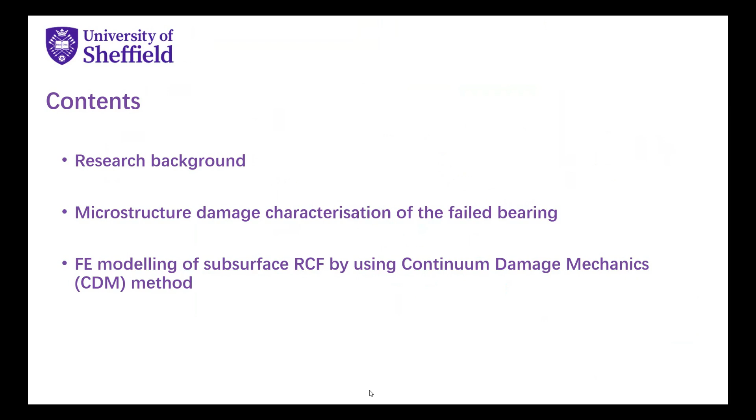So my name is Rui, and I'm going to talk to you about my research on the damage characterization and FE modeling of the subsurface rolling contact fatigue in wind turbine gearbox bearings. At the beginning of my presentation today, I'm going to talk about my research background. Then I got some real pictures from the real failed bearing, and I'm going to show you these pictures about the subsurface rolling contact fatigue. And in the end, I'm going to introduce my FE modeling of the subsurface rolling contact fatigue. I use continuum damage mechanics, which is called the CDM method, in my FE modeling.

Okay, here's the research background. If we look at the picture in the top right, it is the structure of the wind turbine drivetrain. Of all the drivetrain failures, gearbox failures take about 10% of overall drivetrain failures. But in these gearbox failures, bearing problems are a big issue, taking about 76% of overall gearbox failures. And that is the reason why my research is on the gearbox bearings.

There are 2 bearings I investigated in my project. The first one is the upwind planetary bearing, which has been marked by these black circles here. And the second one is the downwind planetary bearing. They all come from the V80 2 megawatt wind turbine gearbox, and the manufacturer wanted us to find out the reason for the premature failure of these bearings. Based on our investigations, we found that the subsurface rolling contact fatigue, the subsurface RCF, is very important to this premature failure of the bearing.

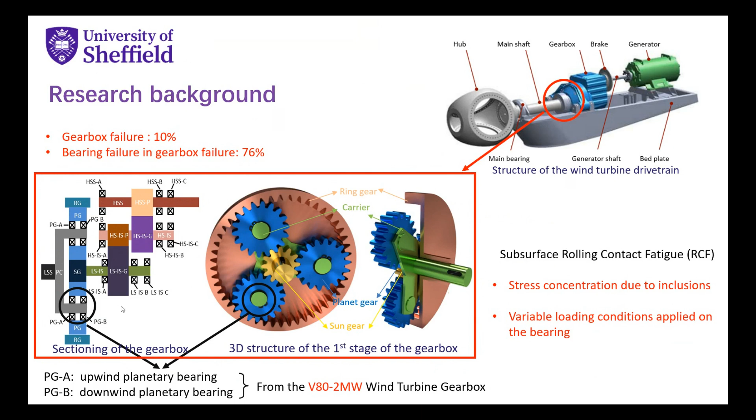And we also found that there are 2 reasons for the rolling contact fatigue here. The first one is the stress concentration caused by subsurface inclusions. And the second one is related to the loading applied on the bearing. So sometimes overloading cases may accelerate the subsurface rolling contact fatigue and cause the premature failure of the bearing.

Okay, let's look at the microstructure damage characterization first. On the left-hand side, the inner raceway of the bearing is fixed with the planetary carrier. So when you put a torque on the bearing raceway, the loading zone is fixed, as shown by picture B here. So in the real bearing, you can see a certain area on the surface is damaged, but not everywhere is damaged. It's just fixed on a certain area.

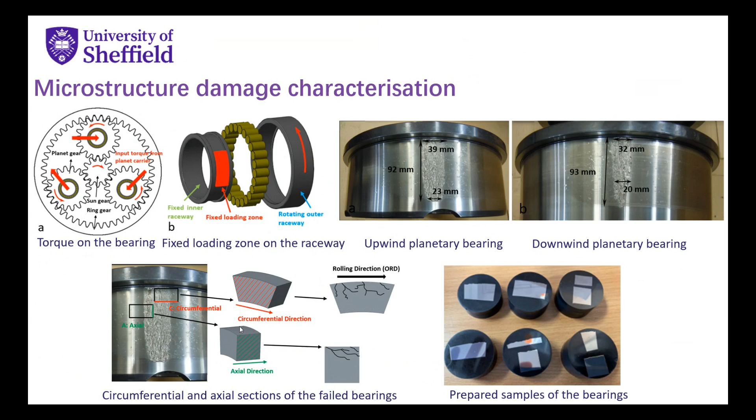And I'm going to look at the subsurface damage in the circumferential direction and axial direction to see the difference between these two sections. Before we use the optical microscope and SEM to do the observation, these samples should be polished and etched, as shown by the picture here.

Okay, here are the pictures of some rolling contact fatigue damage. I think the first damage stage is the damage caused by the subsurface inclusions. In most subsurface areas of the bearing, most inclusions are undamaged, as shown by figure A and figure B here. They are undamaged inclusions.

But because we have the heat treatment and loading on the bearing, sometimes we get some boundary separation between the steel matrix and the inclusion, and sometimes the inclusion itself may have some internal cracks, as shown by picture E and picture F here. They are internally cracked inclusions. So the stress concentration level of these inclusions will be higher because they are already damaged by this boundary separation or internal cracking.

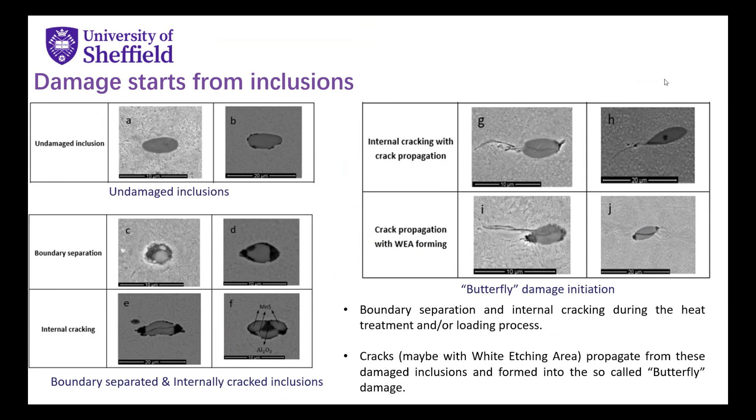Then we got some subsurface rolling contact fatigue cracks that propagate from the tips of the inclusions. These are so-called butterfly damage. And sometimes we can also observe some white etching areas around these butterfly cracks. These white etching areas are a change of the steel structure from martensite to ferrite, and it makes the material become hardened and much more brittle, and it reduces the toughness of the structure and accelerates the crack propagation here.

And the second stage of the rolling contact fatigue is related to the crack propagation. So when we have the fatigue cracks propagate from these small inclusions, they may connect with each other and form very long subsurface crack networks, as shown by picture A and picture B here. They are all subsurface cracks. And if these subsurface cracks propagate to the surface, it will cause spalling on the surface, and it accelerates the failure of the bearing, as shown by figures C and D over there.

And when the surface is already damaged, it will cause very high stress concentration on the surface, and sometimes, because the surface is damaged, we may have some impact loading from the rollers. So these kinds of loadings may cause secondary cracks, as shown by the pictures on the right-hand side. These secondary cracks are typically very long because the loading is very high, and it accelerates the failure of the bearings and accelerates the spalling on the surface.

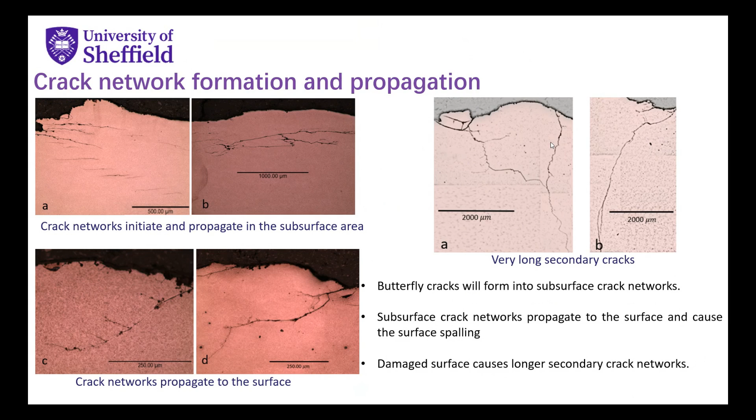And also, we can observe some white etching areas of these cracks. As you can see on the left-hand side is a very long white etching crack, WEC, observed in the subsurface area. And you can see many WEAs can be observed near the cracks. And at the moment, we still don't know which one forms first, the WEA or the cracks. But in this case, I think the crack may initiate first,

because if we look at this picture in detail, we can see the white etching area in a very deep area, about 4 millimeters below the surface. And I think without the influence of cracks, the white etching area will not be produced in such a deep area, because the effect of loading on the surface may only affect the region about 1 millimeter below the surface, but this one is about 4 millimeters, so it must be the effect of cracks.

So in this case, I believe the cracks initiate first, and because of the formation of cracks, there may be some very complicated reactions between the crack surfaces, maybe squeezing and friction and heating between these crack surfaces. And then we have the dissolution of cementite and the redistribution of carbon and chromium elements. Then we have the white etching area along these cracks, and that is the so-called WEC in this specific bearing.

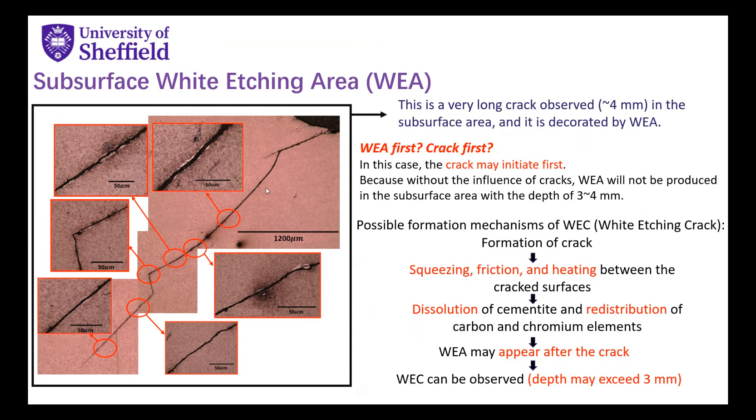So here's the quick conclusion. In stage 1, we have butterflies, and the cracks may propagate and connect with each other. So that is the subsurface crack network. Then we may have some WEA and WEC, which accelerate the crack propagation. And the final stage is the surface spalling, or the premature failure of the bearing.

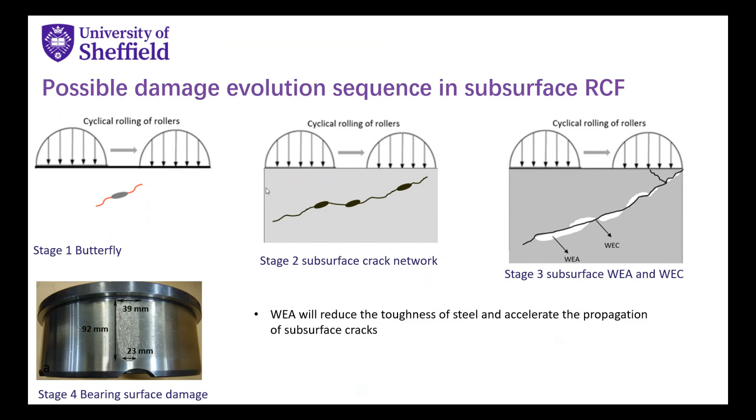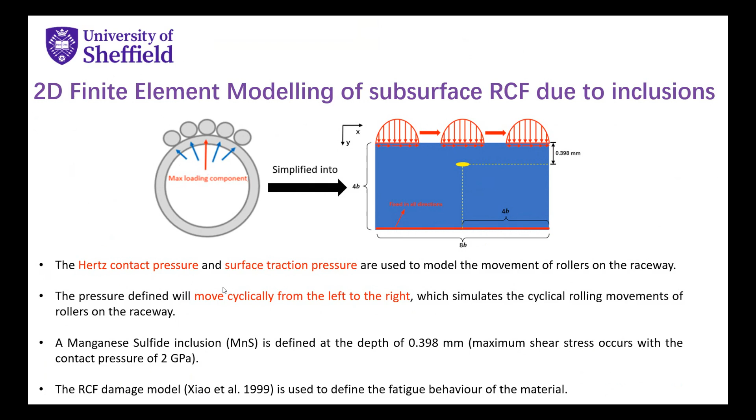Okay, let's look at the flowchart of the FE modeling with the CDM method. At first, I defined the plastic deformation in my modeling because we have the stress concentration due to inclusions, so there may be some plastic deformation in the subsurface area around these inclusions. And when yielding happens, I also consider the Bauschinger effect of the material. Then I calculate the back stress, and I update my stress based on the kinematic hardening model here.

And as you can see in the red circle here, this is the equation I used to update the damage parameter D in the CDM damage model. In this fatigue model, this D value is related to the amplitude and mean value of the alternating orthogonal shear stress. The reason why I use the amplitude and the mean value of the stress is based on the Goodman fatigue theory, because it holds that the fatigue behavior of a material is related to the stress level and the mean stress of the overall loading.

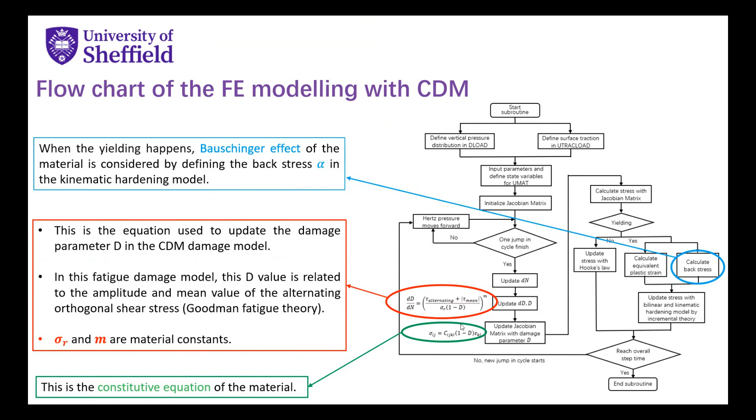So that is why I use these two stresses here to calculate the damage value. Sigma r and m here are material constants which can be determined from the S-N curve of the material. In the green circle here, this is the constitutive equation of the material. When the damage happens, the stiffness of the material is reduced. Then I update all the stress based on the constitutive equation here.

Okay, let's look at the results of my FE modeling. At first, I'm going to figure out the effect of the inclusions with different damage types based on the optical microscope observation. We have found that some inclusions are undamaged, some have boundary separation and some have internal cracks. So I compared the effect of these three kinds of inclusion damage.

In these three FE models, the maximum Hertz contact pressure is fixed, the contact cycles simulated are 20 million, which is also fixed, and the traction coefficient applied is 0.1. The traction pressure is caused by the friction between the roller and the raceway, so this value is linked with the lubricating condition. When the lubrication is good, the coefficient is small. In all three models, the value is fixed as 0.1 here.

If we look at the results, we can find there isn't any damage at the tips of the inclusion in the undamaged inclusion model, but when there is boundary separation between the inclusion and the steel matrix, there is a fatigue crack here. And there is also a fatigue crack here when the inclusion is internally cracked.

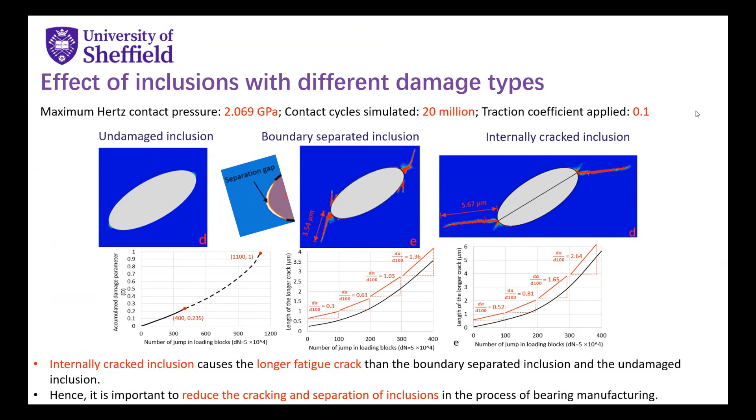Then I'm going to investigate the effect of surface traction pressure. I change the surface traction coefficient from 0.01 to 0.1 to see the difference in surface traction pressure, and all other values are fixed, such as the maximum contact pressure and the contact cycles simulated.

Based on the modeling results here, the fatigue crack length increases with the surface traction pressure, especially when the traction coefficient exceeds 0.05. That means when the lubricating conditions become worse, it will accelerate the fatigue and the damage of the bearing. So a bearing with better lubricating conditions will have a longer fatigue life.

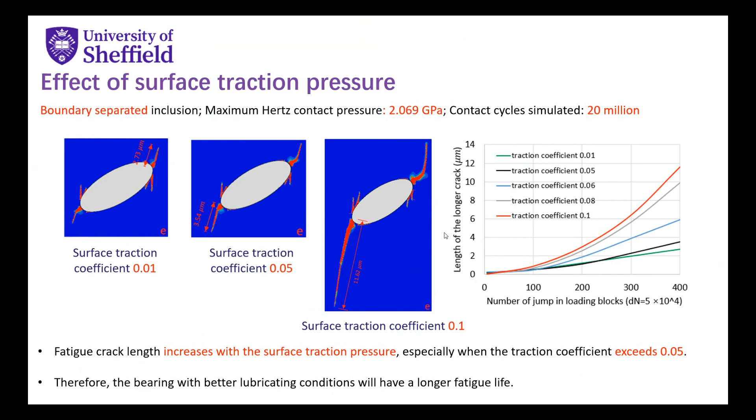In the end, I'm going to study the effect of the loading variation on rolling contact fatigue. In this case, the loading is not a fixed value, but changes from 0.92 to 2.84 gigapascals. All these values come from the calculations of the wind turbine design standard. If you look at this picture here, in this case the loading only changed once from 0.92 to 2.84.

But in this case here, I call it two loading groups because it changed twice, from a smaller value to a big value, then from a smaller value to a big value again. And we can see the difference. The fatigue crack becomes longer than when it changed once.

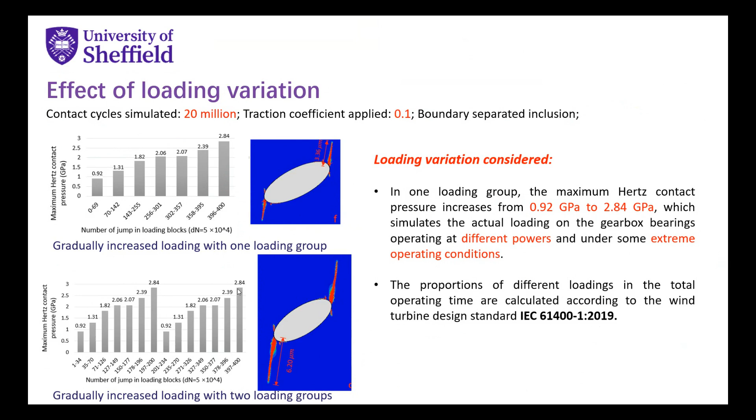Then if we change it 4 times, I call it 4 loading groups. It changes 4 times from the smaller value to a big value, and when we compare these results together, we find that with 4 loading groups, the crack length is longer than with 2 loading groups and 1 loading group. So the loading sequence of the different loading amplitudes does affect the initiation and the propagation of fatigue cracks. And the more frequently the high stress magnitude occurs, the longer the fatigue crack will be.

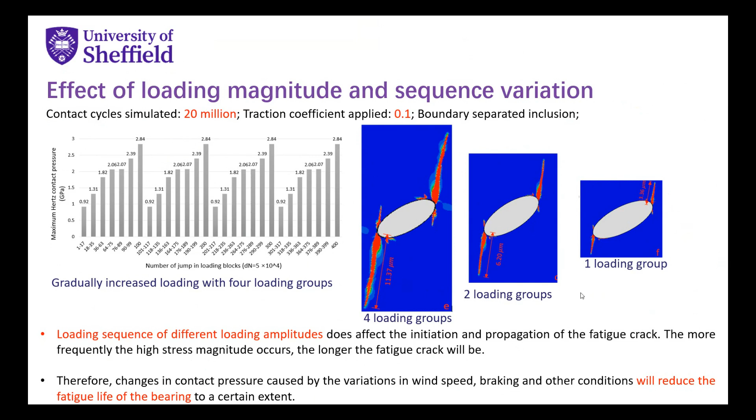As I said, this change of loading may come from the change of wind speed or other conditions such as braking or grid loss, which may all cause a change of the loading on the bearing.

To validate the effectiveness of the FE modeling, I compared the modeling results with twin disc test results from a published paper of the University of Southampton. It can be found that my modeling results are very similar to the real butterfly damage in the twin disc test.

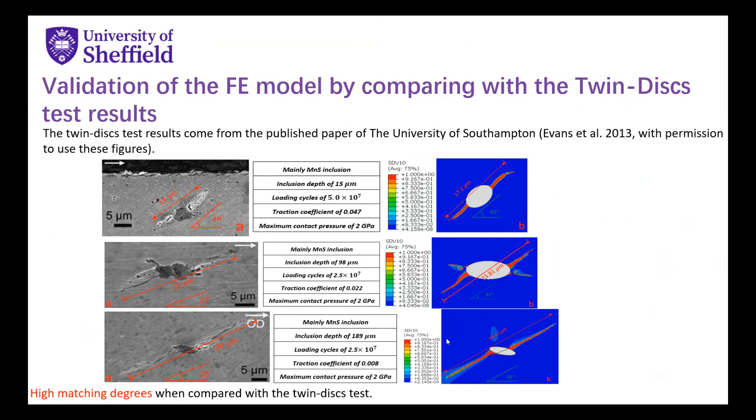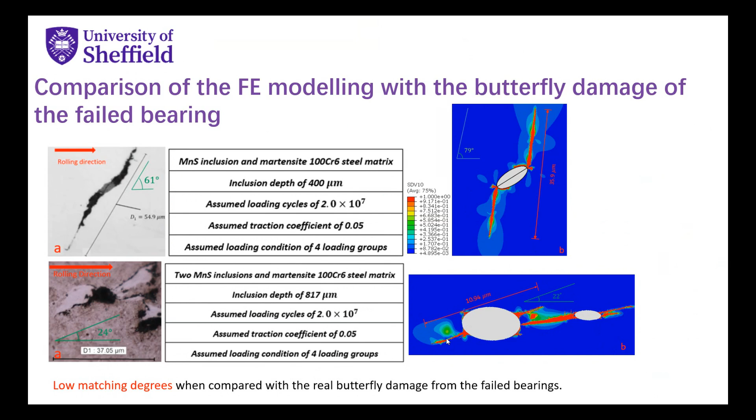I have 3 comparisons here, and all the results I think are very good. But when I use this FE modeling to simulate the real butterfly from the real failed bearing, I think the result is not satisfactory, because when I compare the propagation direction and the length of the butterflies here, they have a very large difference from the real butterflies in the failed bearing. So I think there may be some problems here.

First, the effect of the difference between the assumed and the actual loading conditions on the raceway, because we can't simulate the real loading conditions on the bearing, so that may cause the difference. That's the first reason. The second reason is the geometry of the inclusions in the modeling. It's just a 2-dimensional model, but in the real case the inclusion is 3-dimensional, and it may have irregular boundaries, which is not considered in the modeling.

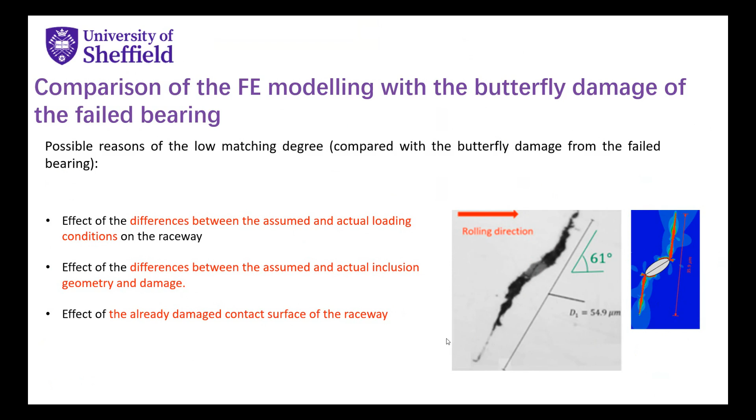And the last one is the already damaged contact surface of the raceway. Because the raceway surface is already damaged, it may cause some stress concentration or change of pressure on the surface. So that may also cause the difference between the modeling and the real butterfly damage from the bearing.

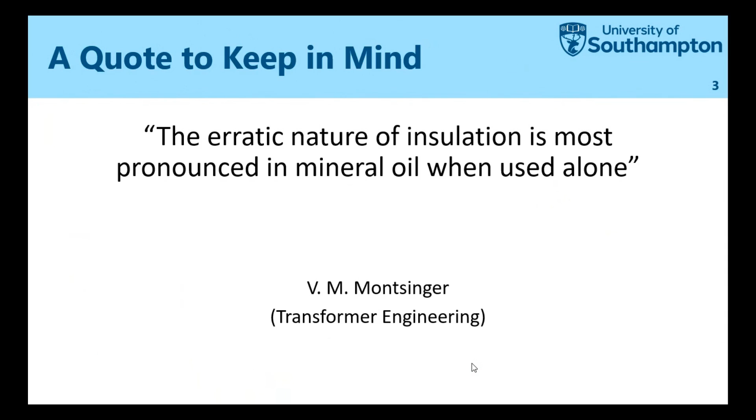A little bit of background to where this study comes from. Similar to Rui's wind turbines, electric motors have stray currents that are induced in their housing, and then they pass through the bearings, and those stray currents can cause the bearings to fail faster than ones that are uncharged, as in a regular wheel axle.

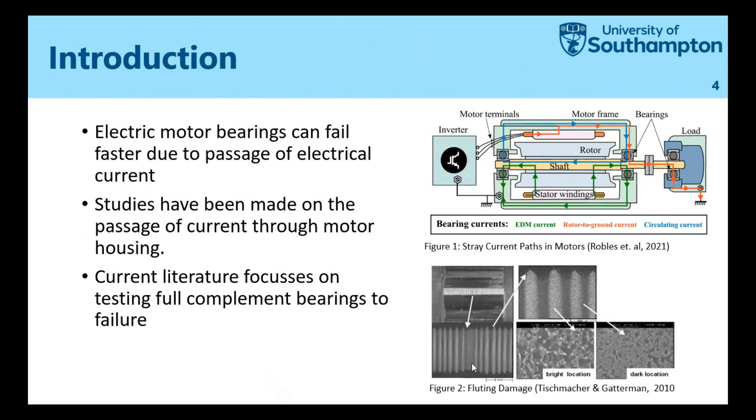A lot of research has been done into this phenomenon for quite a few years now, but most literature that I've read focuses on testing full complement bearings with bearing races and rolling elements, and there's not so much investigation into how the electric current passes in a transient nature, and the focus on the tribological scenario isn't that great. So I wanted to base my research on a single rolling contact with which I can investigate the mechanisms of electrical discharges across a single surface pair, which I think is a little bit more controllable.

So what I'm aiming to do with this project is to generate controlled electrical current through a single rolling contact and establish a method to record its behaviour, then vary the electrical and tribological parameters across this contact, and record the effect of this variation on the current passage. Then I'm going to evaluate how these parameters are linked to resultant electrical signals, and whether that matches some assumptions that we make about the contact.

So just to quickly bring to the forefront some of the appropriate tribological theory. Hopefully everyone's heard of the lambda ratio, which defines your degree of separation of asperities and the lubrication regime. But in an electrical sense, as this changes, the oil film can be represented as either a resistor, a combination of resistor and capacitor, or at full lubrication, just a capacitive element. Classically, we use the Hertzian area and the film thickness to determine the capacitance at full lubrication. But as the lambda ratio decreases, that approximation breaks down, and that's not been investigated quite as much.

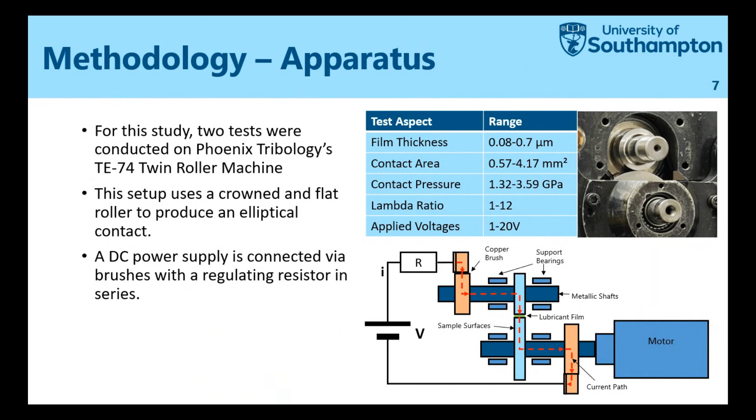And for the 2 tests that I'm about to present the results for, I just run a sample pair in, and then once that happens, we apply voltages between 1 and 20 volts with different resistor values swapped in and out to generate the discharges across, in this case, a fully lubricated contact, very, very high lambda ratio. And we use a picoscope, which is basically a very fancy oscilloscope connected across the contact and the resistor to measure transient voltage signals, and what I'm going to refer to them from now on as waveforms.

When the sample's running stably, I've ramped the voltage in 1 volt increments from 1 to 20, and at each resistor voltage combination, I've taken a bank of waveforms from which I can look at the behavior of the electric current for that combination. But what does this actually look like?

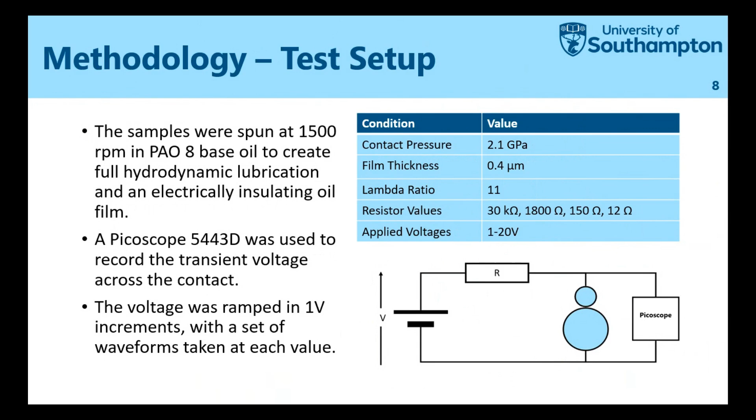So for the first test, I ran it at 60 degrees, and I only had the 30 kilo ohm and 12 ohm resistors, so one very, very low current, one very, very high current scenario. And in this case, because this was used on an older electrical setup, I didn't manage to record the voltage across the resistor itself. This is just across the contact.

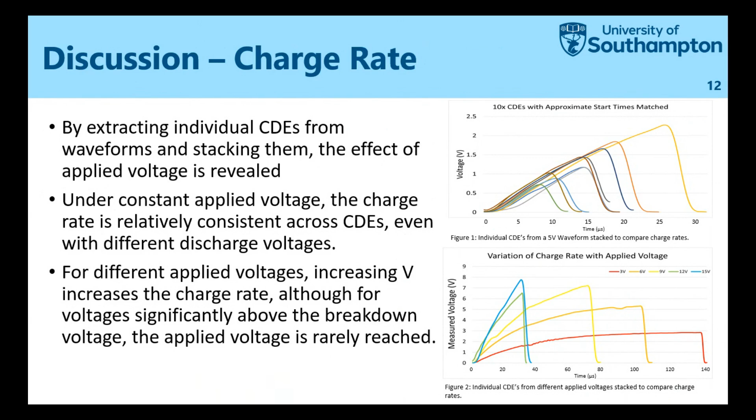So with MATLAB, you can also count the peaks across multiple waveforms. So in this case, I've counted not only the amount of discharges for 10 times 10 millisecond waveforms, I've also recorded the value of each discharge voltage, and then seen what the distribution is. And it follows a rough Weibull distribution. It's a little bit spiky because it's not that many, but with more tests, I can smooth out the line a little bit.

But what it also shows is a significant amount of sub 1 volt discharges, which I think might be to do with the film thickness or the insulation of the oil not re-establishing itself, or just vibration causing little changes in the voltage across the contact. But it does show that with increased applied voltage, the average value of discharge increases.

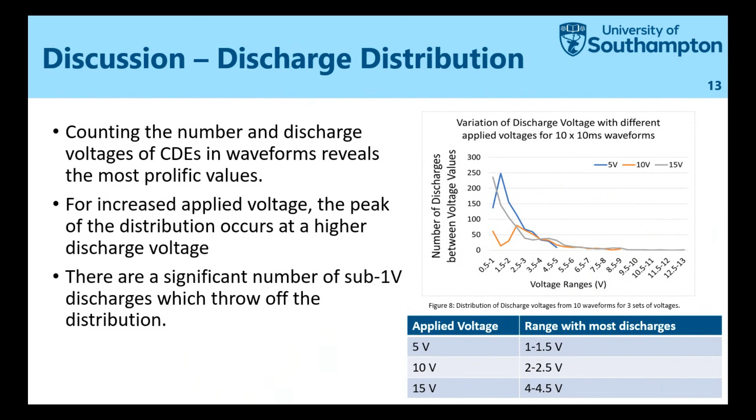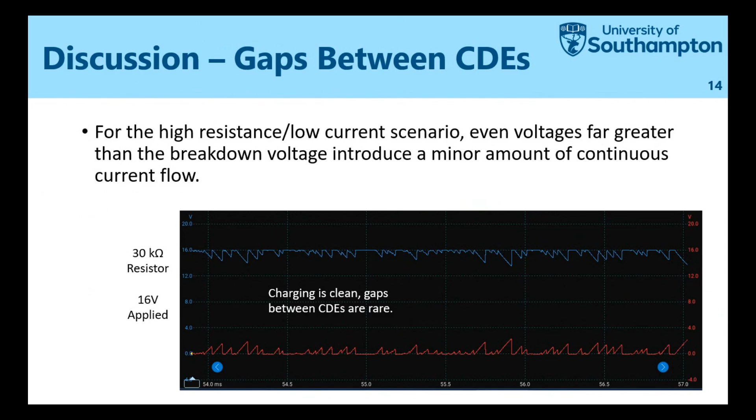And this waveform here, I've cut out only 3 milliseconds, but it's easy to count the amount of discharges. It's easy to put that in MATLAB and say, count the amount of peaks, please, and it'll give you a clean one. But then when you swap in the 150 ohm resistor, leaving it in exactly the same tribological scenario, basically I've left the rig running, turned off the power supply, pulled out the resistor, swapped in the other resistor, and applied the power again. That's how quick it was done.

There's only 2 major discharges and 2 extra slightly more minor ones recorded in the same 3 millisecond period. Even though the charge rate's significantly higher, so if it wasn't doing all this continuous current scenario, you'd be counting hundreds if not thousands of discharges if it kept the insulating property. But in this case, we get individual discharges and then continuous current for a significant amount of time until something happens.

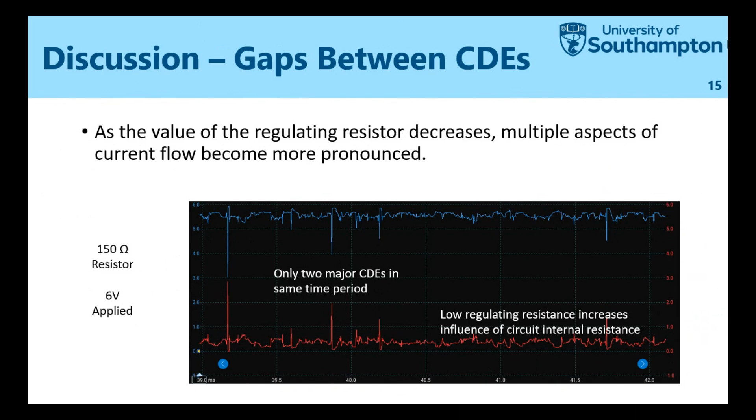With this case, I'm still trying to figure out why using the low value resistors doesn't allow re-establishment of insulating properties, even though the spinning discs are continuously bringing in fresh oil. And if you think about them rotating against each other, any metallic bridges will break just through rotation. If you want me to fully explain, get back to me in a month, because I'm currently running around people who know more than me, trying to work out roughly what may or may not be going on.

So in the future, I'm going to be extending the study with even more resistor values, trying to focus in on the combination of capacitance and lambda ratio, and then a little bit of simple modeling of the contact in ANSYS to verify some of our capacitance assumptions, because as I mentioned, classically we assume that the contact area is the capacitor area, but that's sort of being challenged here.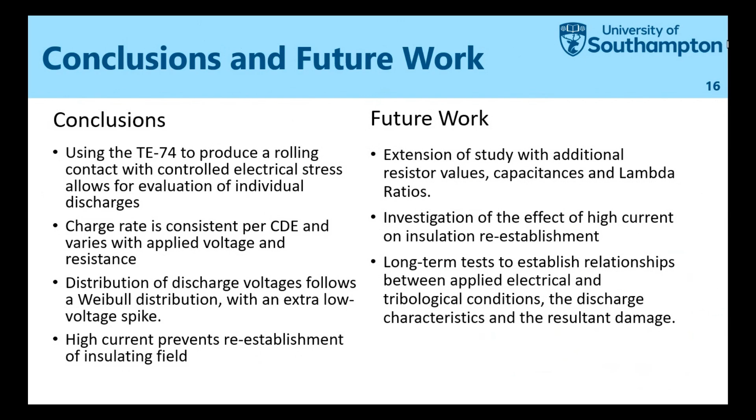And then keep investigating the influence of high currents, maybe extend it outside of a rolling contact, just have 2 plates, just to simplify it and see what's happening there. And then a long time down the road, slightly longer tests to combine these electrical signals and the tribological conditions to resultant damage that happens when you run this for much, much longer than this test was run.

So I'd like to finish up with just a quick list of references for some of the figures that I had in earlier slides, and I will ask for any questions.